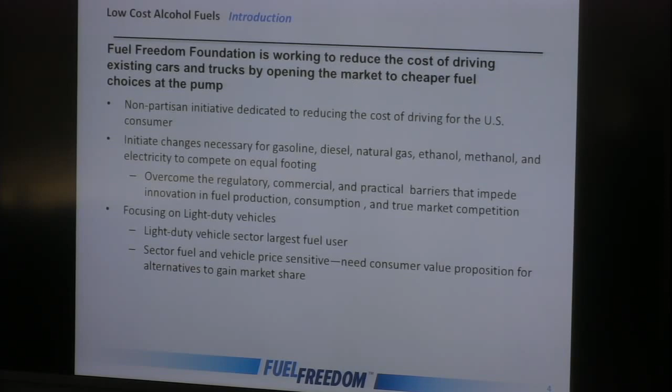As such, our focus is on the light-duty fleet, so the average passenger vehicle. The main reason for that is that this is the largest fuel-using sector, and therefore it represents the most promise for other fuels to gain market share.

Specifically, we're interested in liquid fuels produced from natural gas. As we've been talking about all morning long, the price of natural gas is low now and has been low, and there's an abundance of it in the U.S., expected to continue for many, many years, decades to come. And there's technology available to not only keep the price low, mainly the shale revolution proves that, but also to convert the natural gas into liquid fuels.

Such as methanol and ethanol. A lot of these technologies have been around for a long time and have been used and proven, and can create a cost-competitive fuel at the pump for consumers.

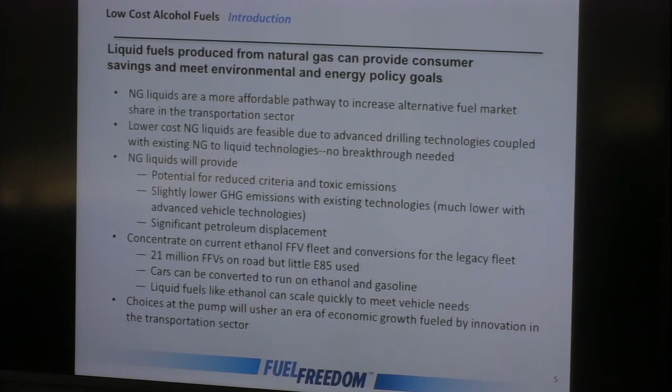And liquid fuels like ethanol can scale pretty quickly. There's already distribution and infrastructure in place. There's a lot of producers and a lot of industries and trade organizations and such that already have a stake in it and promote it, and presumably would be happy to see its market share increase.

And with the increasing market share of these other fuels that can be made from natural gas, we think that would really spur competition and innovation in the fuels market, and could really lead to economic growth and help the average consumer.

In the past, natural gas has tracked oil prices, but beginning at the shale revolution, where we unlocked all this new natural gas in the country, there's been a decoupling of natural gas and oil prices. That gap is expected to continue for many years to come.

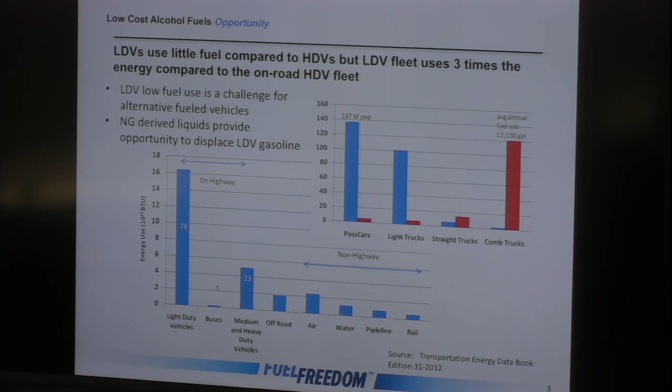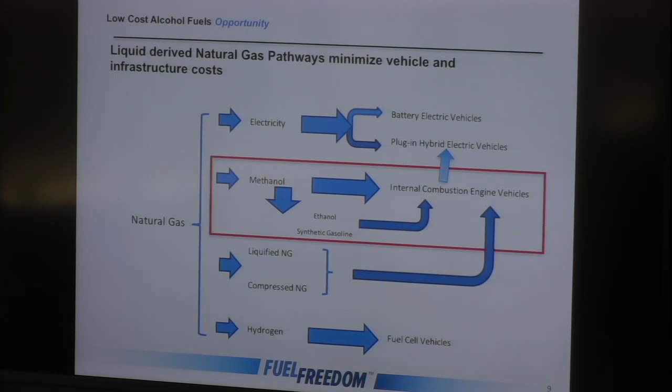But the LNG, CNG, and hydrogen fuel cell vehicles are still a very small market overall, maybe about 5% of the fleet, and most of the LNG and CNG is on the heavy-duty side. Very little of it is in light-duty vehicles.

So these are the fuels that we can use on the light-duty side that can be made from natural gas. Ethanol, currently in the U.S., is primarily made from corn, increasingly from cellulosic sources. The good thing about ethanol is you have a large range there. The blend of ethanol and gasoline could be as low as 51% and go as high as 83%, according to the specifications. A benefit of a lower blend would be that you may see a little bit less of a mileage loss for the vehicles.

There's a large population of flex fuel vehicles on the road today that can take these fuels, and many more continue to be produced and sold all the time. There's a fueling infrastructure in place—over 3,000 retailers now sell ethanol, E85—and we've seen some successful retailers that have had high margins and added locations with E85 pumps. There's also a growing mid-level ethanol blend.

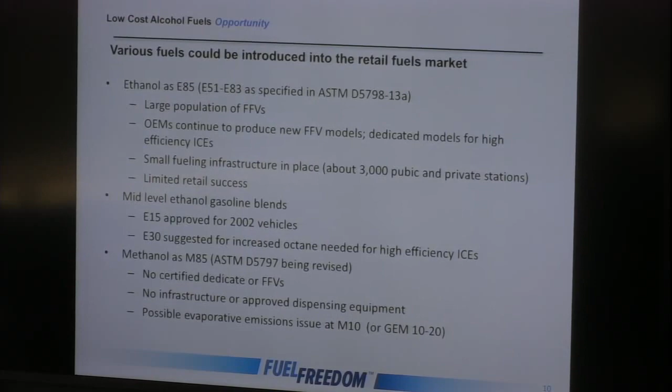E15 was approved by the EPA for use in vehicles—I believe it's actually model year 2001 vehicles and newer that are all capable of running on E15 safely and efficiently. E30, known as a mid-level blend, is also a potential, as it can get a lot of the high-octane, clean-burning benefits of ethanol while still having a lot of the energy content of higher gasoline blends.

Methanol has been used in the past, most notably in California in the 80s and 90s. In fact, my colleague who couldn't be here today worked heavily in that program to get methanol into the transportation sector in California. The problem with methanol today is that since that program fizzled out, largely due to low oil prices at the time making methanol not very competitive, there haven't been new vehicles made to run on it, so there aren't really vehicles on the road today that can take it, not in dedicated or flex fuel form. The infrastructure doesn't really exist, and there may be some emissions issues at the lower methanol blends.

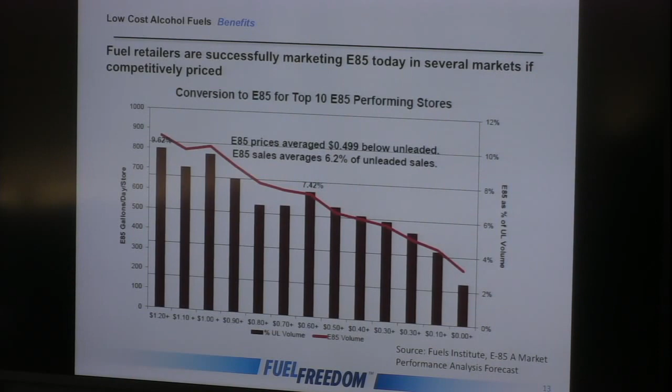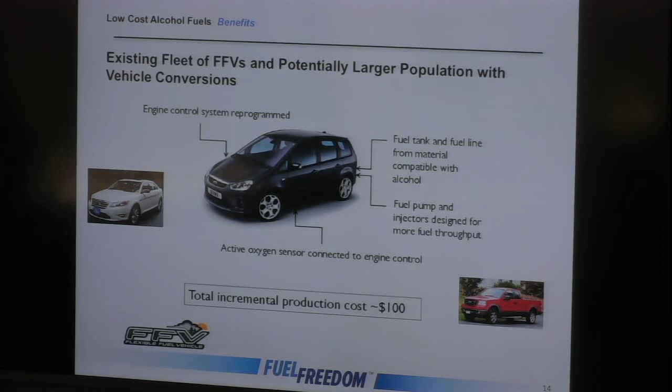Mentioned a lot of this already, but with the existing fleet, there's very little difference between a car that's capable of running on ethanol and one that's gasoline only. There may be some differences in parts to make them more compatible, although there's evidence that suggests many vehicles not listed as compatible with ethanol actually have parts that are. There are also some software adjustments for the computer to tell the engine how to run on ethanol, in terms of ignition timing, spark timing, etc.

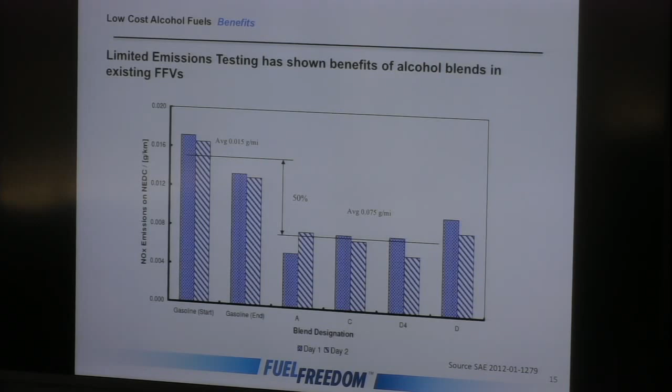That leads to emissions benefits, since the computer controls the engine and the engine timing affects emissions in many senses, which helps achieve the lower emissions possible with ethanol. This graph shows testing done by Lotus of gasoline and various alcohol fuel blends, both ethanol and methanol, and you can see a much lower average of NOx emissions, which is a regulated emission by EPA, with the alcohol fuel blends. There's been other testing to suggest this as well.

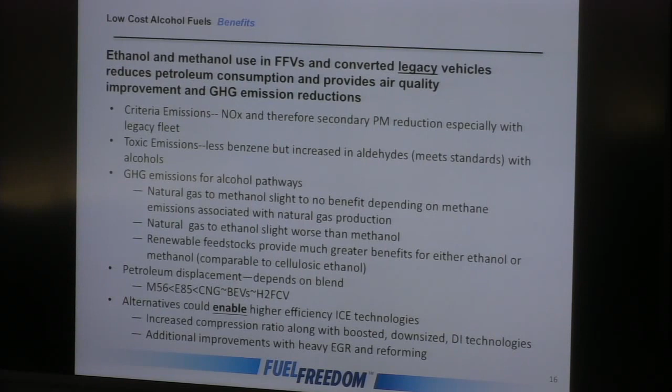So more of the benefits, as I mentioned, the NOx benefits, which can help with reaching ever-increasing ozone standards. It's less toxic - there's less benzene. If you went to a 100% ethanol blend, there may be no benzene. There's also less toluene.

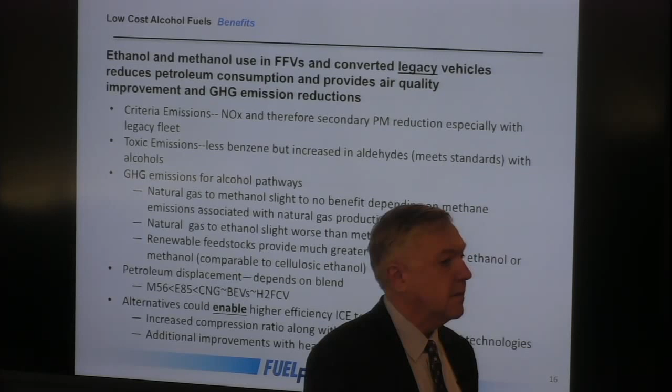However, there are more aldehydes. But all the flex fuel vehicles on the road today meet EPA standards, even though their emissions may have higher aldehyde emissions compared to gasoline. They're still within standards and can perhaps be made even better in the future as automakers tune their cars and design them to run better on ethanol, if it continues to get market share.

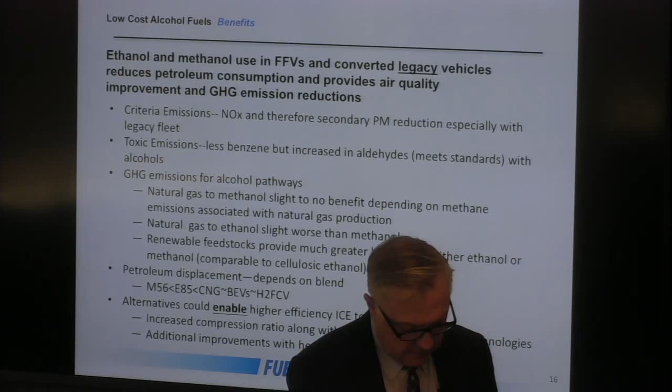The GHG emissions can also be lower. Natural gas to methanol will likely show a slight improvement compared to gasoline, and this will depend largely on the fugitive methane emissions. If you can really get that under control, it'll probably show a greater benefit. Ethanol made from natural gas will show slightly worse results than methanol. Again, if you can get the fugitive emissions under control, you can see a benefit, and that could really help - getting fugitive emissions under control could really be economic if there's a greater market for natural gas in the transportation sector.

And lastly, these alcohol fuels can enable even greater efficiency and greater improvements in vehicles in the future that gasoline simply can't handle, due to its low octane rating and other fuel properties. You get better charge cooling with alcohols.

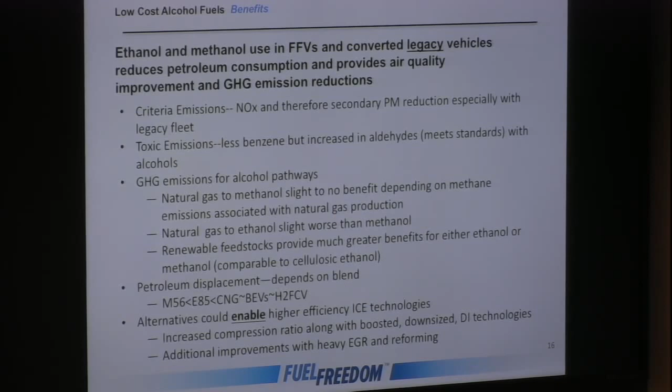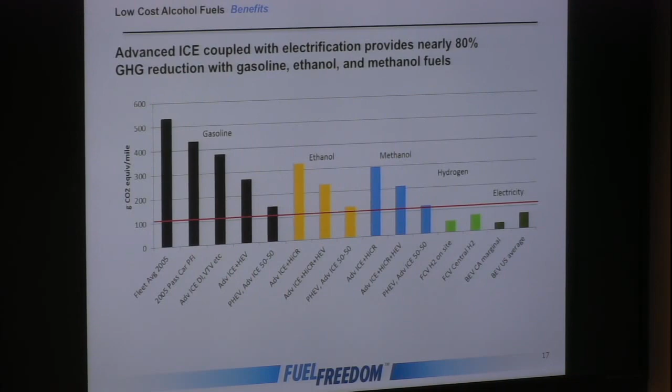You can use cars on the road today. You can make new cars that don't require expensive batteries or other expensive systems - they're basically slightly modified gasoline vehicles. As shown earlier, that's an incremental cost of about $100 a vehicle, which for a new car is not insurmountable. And I think I will leave it at that.

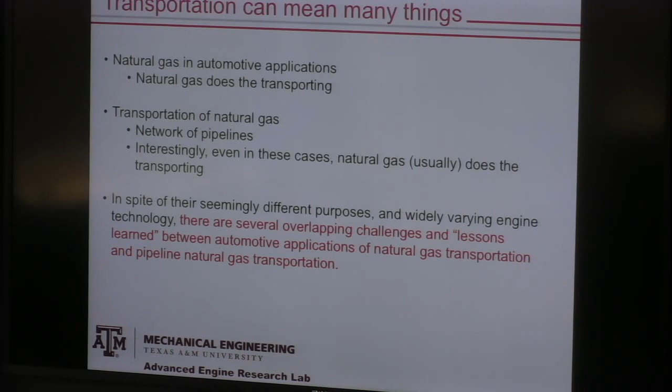So when we say transportation, it can actually mean many things. One is transportation of humans and goods, vehicle transportation. The other type of transportation is that of natural gas. And so we have, as was discussed in the first panel session, a large network of pipelines.

Interestingly, even in this case, the natural gas itself still does the transportation, as I'll talk about in just a moment. So even though it seems like these are two entirely different industries, oil and gas and automotive transportation, the technology is at the core the same, and a lot of the lessons learned from either industry is highly translatable, as I hope to point out in the presentation.

I won't spend much time on this since we've already had a very nice panel on the pipeline system, except to simply point out that the network is huge. If you were to stretch the pipeline end to end, it would go around the earth 10 times. It moves enough natural gas that you could fill over 500,000 Empire State Buildings at standard conditions, on a yearly basis. So there's a tremendous network in place, and it moves a tremendous amount of natural gas.

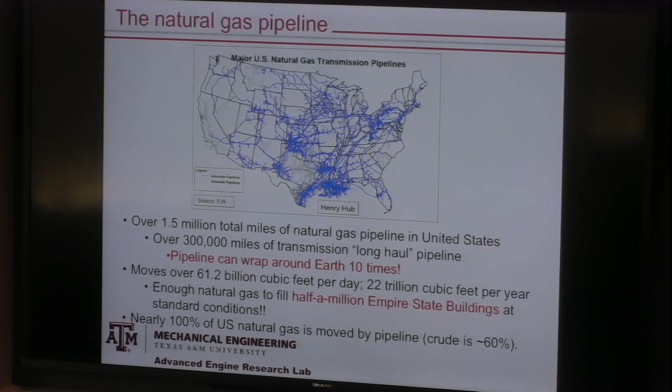But that gas can't move itself without some kind of prime mover, some kind of technology that compresses and pressurizes the pipeline, pulls it from the wellhead, sends it through the distribution network, the gathering systems, through the pipelines to the local distribution companies, eventually to each residence as we fire our water heaters and our stoves, or home natural gas filling stations, whatever the case may be.

These compressor engines are essentially driving the pipeline. So of course a prime mover is needed to pressurize the pipeline to move the natural gas through it. And when you survey the different technologies that exist around the country in the pipeline network, there's basically three major types: two-stroke natural gas engines, four-stroke natural gas engines, and in some cases electric motors.

Of course, what operators prefer to use are the IC engines, the two-stroke and four-stroke natural gas engines, because you don't have to have some external source or feed of electricity to that compressor station to run that technology. The engines driving the pipeline are using the natural gas that they're flowing through the pipeline to operate. So as long as the pipeline is flowing, the engines will operate, keeping that pipeline pressurized, and there's high reliability that the pipeline will continue to deliver natural gas throughout the network.

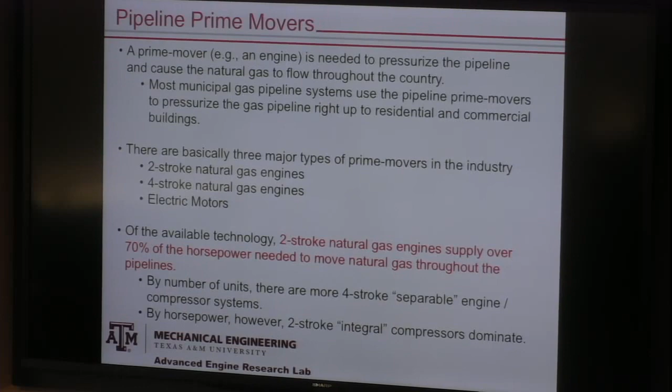When we survey the specific types of technology, the two-stroke engines encompass over 70% of the horsepower required to move natural gas through the pipeline. If you look at the actual number of units, there's actually more four-stroke, what we call separable compressor units, by numbers. But when you look at it on a horsepower basis, 70% of that power is delivered by what we call two-stroke integral compressor engines. We'll talk a little bit about what that terminology means.

But just to give you a sense of scale and size of these types of engines, these are not your automotive engines. These are huge engines that fill buildings - they're the size of buildings. You can see in some of the pictures there's people standing next to the engines.

Actually, in the two pictures where you see a human, the person is standing next to one of the compressor stages that's used to pressurize the pipeline, and the engine is actually on the other side of the compressor that it's connected to. And that's why they're called integral engines.

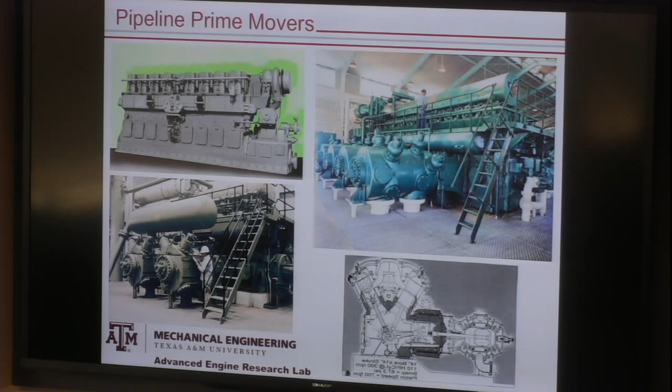There's no power takeoff off the back of the engine, off the crankshaft, like you would have in an automotive engine, where you have a transmission connected to your engine so the power takeoff comes off the crankshaft. In the case of these integral engines, the power to drive the compressors is integrated into the same crankshaft that your power pistons are connected to. So as the power pistons operate the crankshaft, they're also operating the compressor pistons and compressing the pipeline, moving the natural gas through the system. The picture on the bottom right is a schematic of the integral design, and this was invented and patented by the Cooper-Bessemer company.

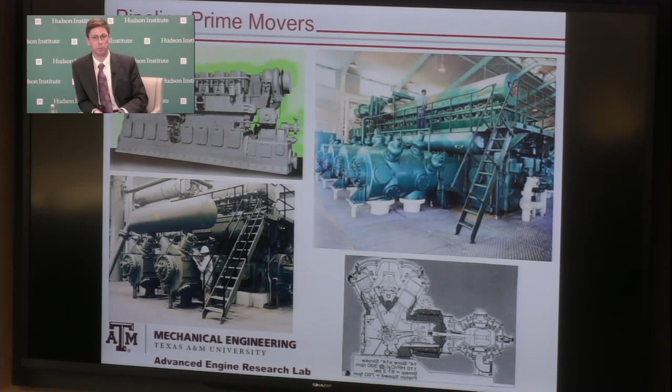If you've ever heard of Cooper-Bessemer, this is what essentially was the bread and butter of that company through most of the 20th century.

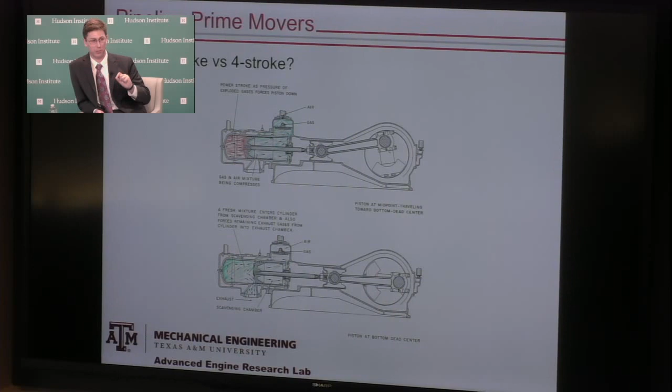I am an academic, so I can't help myself to spend a little bit of time explaining the difference between a two-stroke and a four-stroke engine, and I'll tell you why that's important for the pipeline industry. The primary difference is that you have four fundamental processes that have to happen within an IC engine. In a two-stroke engine, these four processes take place within 2 strokes of the piston, as opposed to 4 strokes.

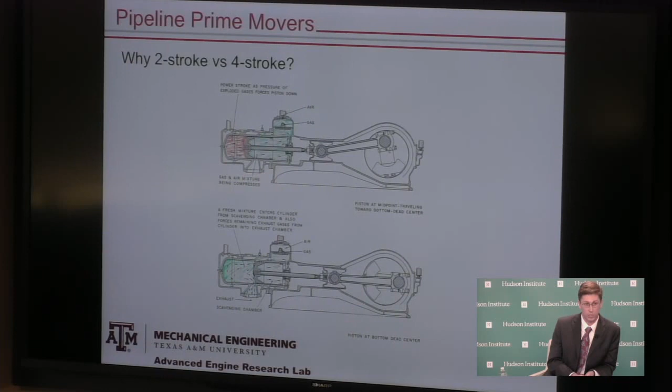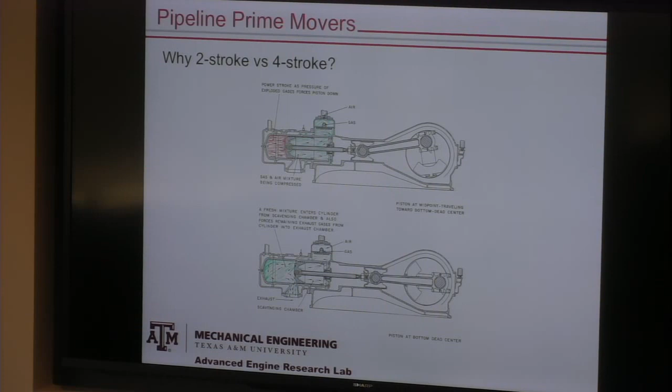If you drive an IC engine fueled vehicle, you're most likely using engine technology that relies on 4-stroke technology. In the pipeline industry, though, one of the key factors that have to be considered is reliability. Integrating 4-stroke technology, where you have much more hardware involved, particularly valves, means having extra technology on an engine that's going to sit, say, 200 miles from the nearest municipality, where the operator just needs that engine to run reliably and consistently. It's not easy to get parts to it, maintain it, or get resources to it. You want reliability, a simple and elegant solution, and that's what the 2-stroke engine technology offers. That's why 70% of the horsepower of the pipeline industry is driven by 2-stroke integral compressor engines. They offer the best reliability in terms of keeping that pipeline operational.

In terms of challenges and opportunities, things we're actually working on in the research and product development community to ensure the pipeline remains of high integrity, at least from being able to flow natural gas through the pipeline system, there are essentially 3 major challenges that we're working on right now.

The first is directly related to the increased level of shale play within the natural gas market, and that's variable fuel composition. This is actually something the automotive transportation industry has dealt with before, so this is an example of lessons learned between the automotive industry and the oil and gas transportation industry.

It's particularly problematic in the natural gas pipeline industry because, unlike in the automotive industry, where you'd be pulling natural gas from a wellhead, different wellheads have different compositions of natural gas. That's not much of a problem because a filling station may consistently get the same kind of natural gas from the same wellhead. So you may have regional differences of natural gas, but you could largely accommodate these since you're operating your vehicle in a consistent location. People aren't always necessarily driving across the country on natural gas automotive technology.

The other challenge is that shale plays not only have variable composition by region, but the variation can also change from seam to seam. As you're fracking through the shale, you run across a seam with a certain composition of natural gas, and the very next seam you frack through has an entirely different composition.

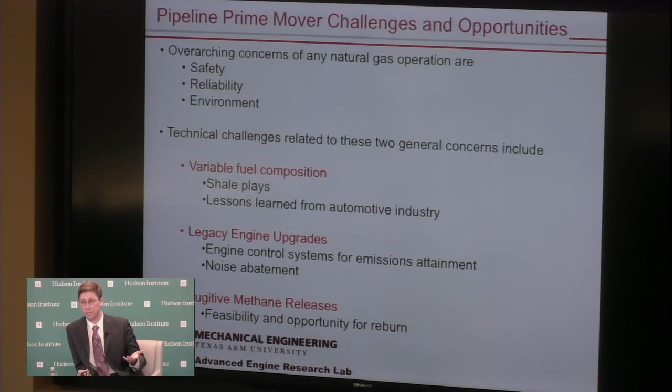That wreaks havoc on the pipeline engines, because they're using that natural gas flowing through the pipeline as fuel. If they're expecting to see a certain concentration of methane, ethane, and propane, and then the next hour it's different—that's how quickly these variations can change. They don't change month to month; they change hour to hour, and sometimes last for days. The engine has to be able to accommodate that different fuel composition.

These engines are old, on old control systems, and they may not be able to respond in the correct fashion. So typically what has to happen is you have to derate your engine—decrease the amount of power it can supply, which directly relates to decreasing the flow of natural gas through the pipeline, cutting into revenue and capacity, as was discussed in the first panel. It's a problem that needs to be resolved.

In fact, one of our partners on this variable fuel research project is Spectra Energy, at their units in Lambertville, New Jersey, where the Marcellus Shale is introducing natural gas compositions that vary by the hour in some cases, and it's highly unpredictable. You may go days without a plug of what we call hot fuel or variable fuel composition, and then have several days where it's consistently changing on a very rapid basis. Being able to design engines so they can operate reliably at full power and meet emission regulations is one of the research challenges we're currently working on.

Also related is the legacy engines. These are all old engines, they've been operating in the field for sometimes 50, 60 years, and so we'd like to upgrade them with new technology. Electronic controls are commonly used in the automotive sector. There are challenges with doing that seamlessly and elegantly so these engines can continue to operate reliably.

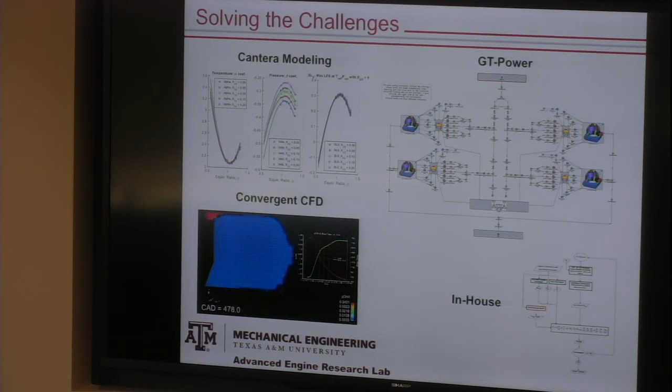How do we solve these problems? This is where the automotive industry has benefited the oil and gas industry tremendously. All of the tools we're using in developing engine technology are coming out of what had been developed in the automotive industry - computational tools that give us insights into the chemistry, how natural gas burns during combustion, and characterizing fluid flow through the engine. Seems like it should be simple, but it's not - it's highly complex. We're writing codes so we can come up with quick solutions that support industry and support product development to advance this technology into the marketplace.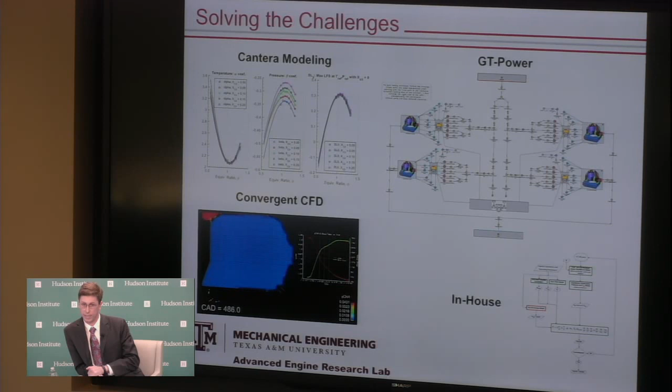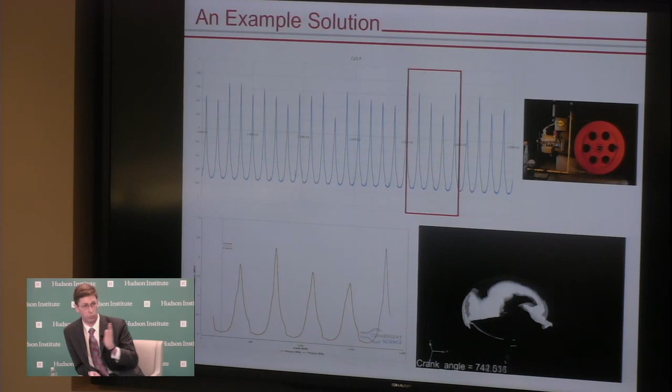As an example of how we've done this at Texas A&M, we have two graphs shown here. Looking at the graph on top, this shows measured in-cylinder pressure inside the combustion chamber as the engine moves through several cycles. Every peak you see is the peak pressure for a given cycle, then the engine completes its other processes, starts the next cycle, and you see another peak.

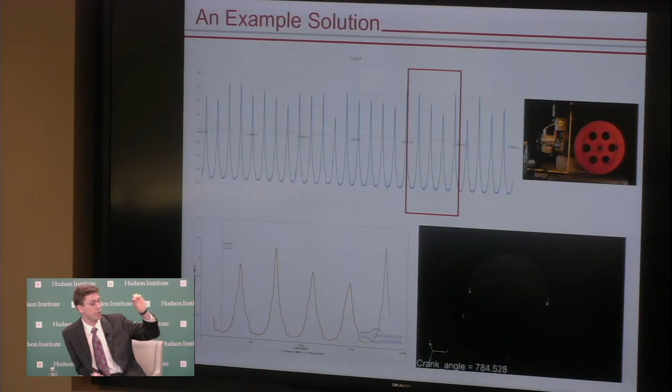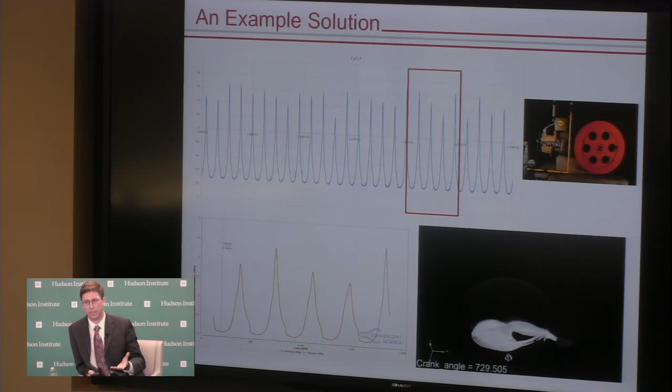In an ideal world, those peaks would all be exactly the same. But if you look closely, some peaks are high, some are low. Particularly in the box colored red, there's actually a sequence of decreasing peaks, and then following that sequence there's now an increase, a higher pressure peak. We call that cycle-to-cycle variability, and it creates a lot of problems for us in running the engine technology reliably and within emission regulations.

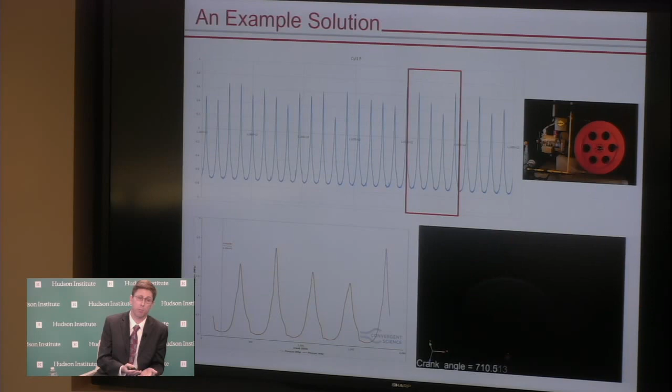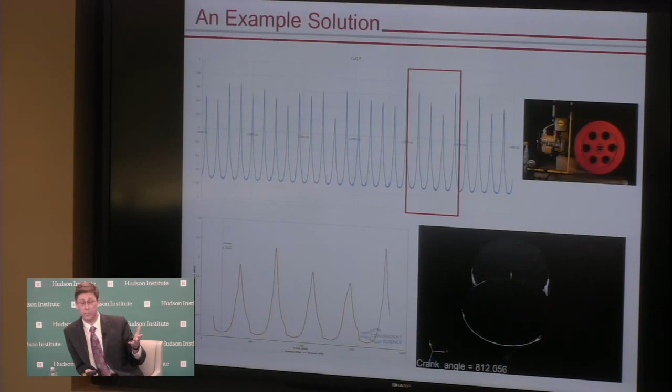So we're currently studying this problem, trying to come up with solutions, but to do this mechanically, experimentally, is costly and time-consuming. It's much better to do it computationally. But to do it computationally, you have to have models that are faithful representations of the actual experimentation. What we're showing on the bottom is the results - these are, in fact, fresh results. The code is still running as I speak. It takes weeks for these codes to run.

You may be thinking, how is that faster than doing it experimentally? It takes years to do these kinds of things experimentally, so there's a much faster time frame when you can do this computationally. What you'll notice is that sequence of decreasing peaks and then a recovery to a high peak was actually captured correctly by the computation. This was all done using first principles - what we call governing equations. There was no predictiveness taken from the experiment and added to the computation to do this. So these solutions have some element of determinism to them - it's not completely stochastic, which means we should be able to arrive at an appropriate solution, something we're currently working on.

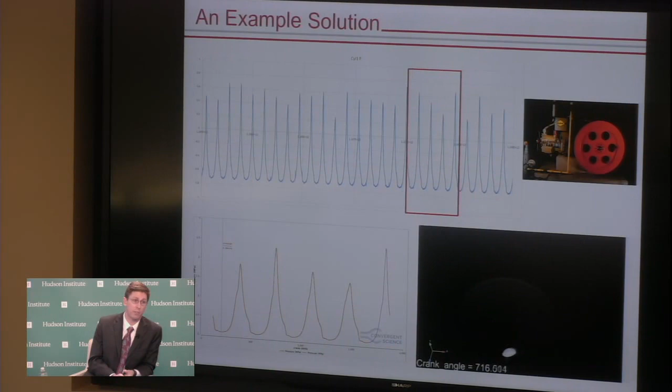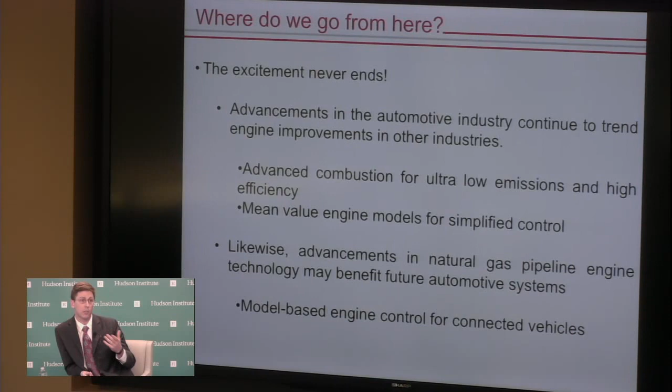So where do we go from here? The excitement never ends. We're learning from the automotive industry, the automotive industry is learning from us, in terms of, say, variable fuel composition. Compressor stations are monitoring their fuel quality regularly, so we know what we're burning - we just need to figure out how to do it appropriately. This is something the automotive industry at times continues to struggle with, particularly with liquid fuels such as gasoline and diesel. Methanol and ethanol and fuels extracted from natural gas would actually solve that problem to a large extent. So we're sharing ideas, sharing technology, learning from each other, and moving technology forward.

Before I close, I have to thank - never trust an academic's presentation if they don't acknowledge the people who actually do the work, and that's the students. So I want to make sure I acknowledge the students. All of the work I've shown here is basically their work. Thank you.

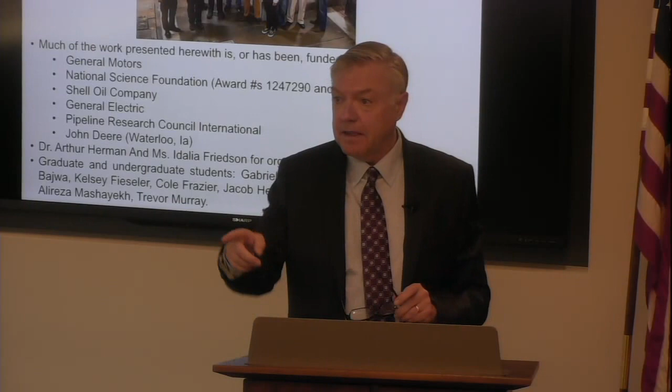Hi, Nick Snow with Oil and Gas Journal. Thank you for a couple of very interesting presentations. My question deals with ethanol derived from natural gas, which I think is an intriguing idea. EPA across the street is very concerned, has had a lot of trouble meeting quotas under the renewable fuel standard. One of the things EPA keeps saying is that cellulosic ethanol is superior to corn ethanol because of the lower greenhouse gas emissions. When you talk about ethanol derived from natural gas, how do those greenhouse gas emissions compare?

They're going to be higher, is the short answer, especially at first. But as I mentioned, opening the transportation fuel market to natural gas can create a market incentive for producers to capture fugitive emissions, as opposed to the regulatory route that's being proposed now for fugitive emissions. And as you get more ethanol into the market and vehicles become better tuned for running on ethanol, and the OEMs really design their cars more for ethanol, knowing that the people who buy their cars are going to be using ethanol, they can make their cars even more efficient than they are now on ethanol.